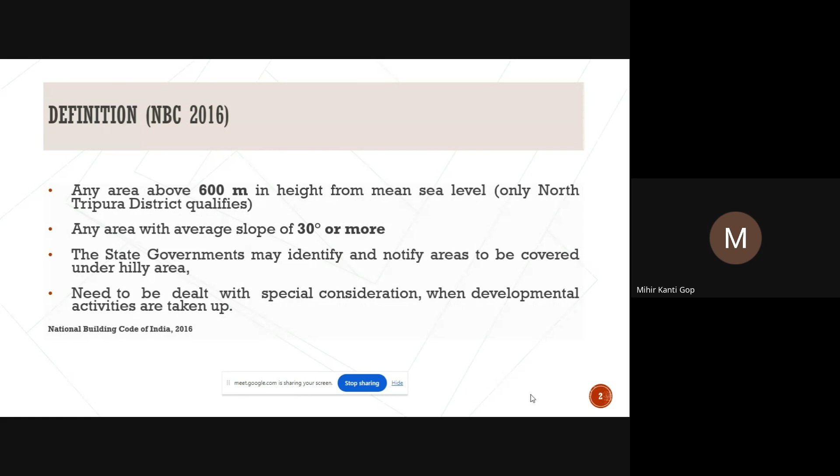Now, what are the challenges for hill area development? Above all, the picture throughout India is the same: urban population growth is increasing. People from nearby areas are trying to habitate themselves in urban areas. A similar pattern is seen in the hill states, starting from Sikkim to Tripura, everywhere.

What are the constraints or challenges we are finding? First is land constraints, because there is limited flat land available for construction. Whether you are an architect, civil engineer, or a general person, you always try to select land which looks very plain for any construction, maybe a school, office, or residential building. So that's a challenge here, first of all.

Then there's greater dependence on personal vehicles, because everybody wants to have his or her own vehicle and finds it comfortable. So inadequate public transport system is also a constraint everywhere. With assistance from JNNURM and now from Mohua, many states have started improving this, but still people want to depend on personal vehicles.

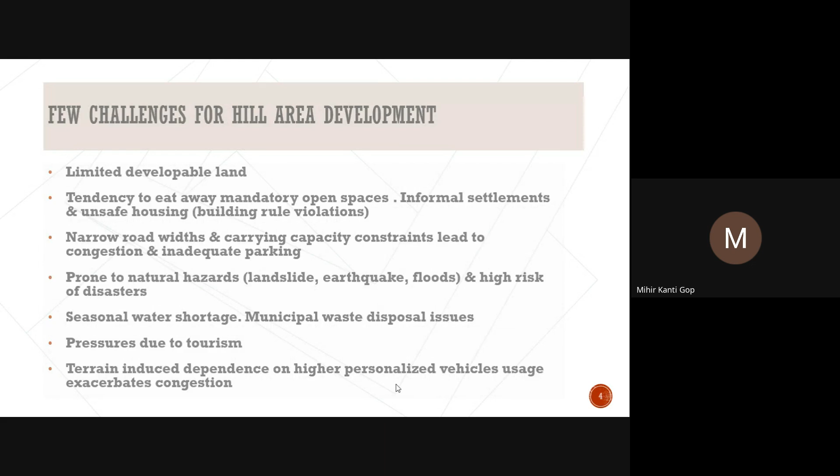There is also seasonal water shortage, which I already explained. Now, theoretically, the general considerations are common everywhere.

While framing or updating building rules, the common themes as a planner we must consider are: population growth, awareness towards environment and social concern, impact on development pattern, impact on transportation network and system, tourism, occurrence and vulnerability to natural hazards, impact on existing buildings, impact on open space and social infrastructure, scarcity of buildable land, impact on natural environment, impact on new development, and impact on townscape.

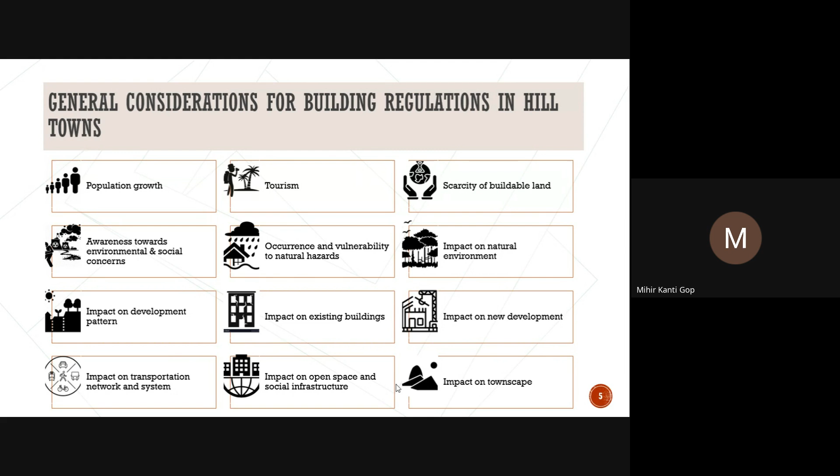A few things not mentioned that I also want to highlight: in the Northeast, many cities have traditional architecture in old buildings, some built by the then Rajas or the British. So we have to conserve our heritage as well - this is also something we need to consider.

Now, what are the adaptations? We have building rules, traffic regulations, pedestrian zones, waste management, water supply management, tourist management, and disaster mitigation, preparedness, response and relief. In many states, some of these are integrated, but in many places they remain disintegrated.

Time has come to integrate these, because when a new construction or project is taken up by any agency or private developer, the architect only works with the building rules. In many states, waste management rules - solid waste, liquid waste management - and water management are framed separately and not integrated with the building rules. So developers only follow the building rules but miss the other statutory regulations.

So we need to integrate these state-wise. If different rules are being adopted for different aspects, let us integrate them, since the state is the same, the land is the same, and the rules are framed by the same government. Why not have a composite framework? This will help the entire developer, architect and civil engineer domains, who are normally the main stakeholders of construction.

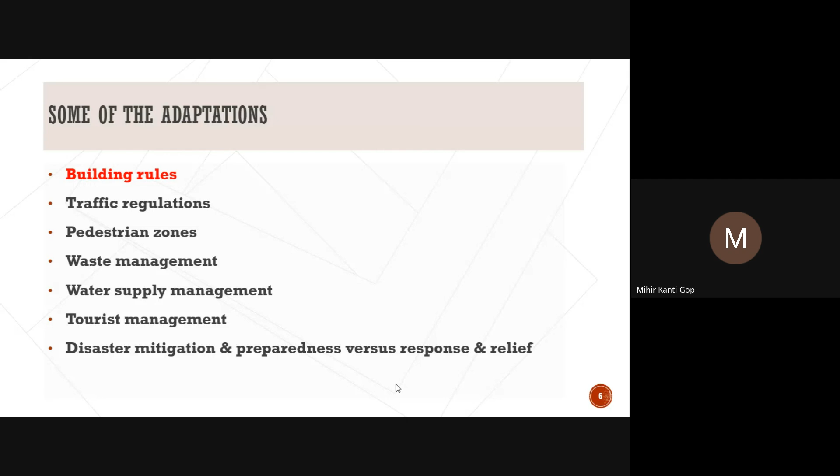Now, in our Tripura building rules, there are a few features already included which I would like to mention, so we can hear from the other two experts today as well.

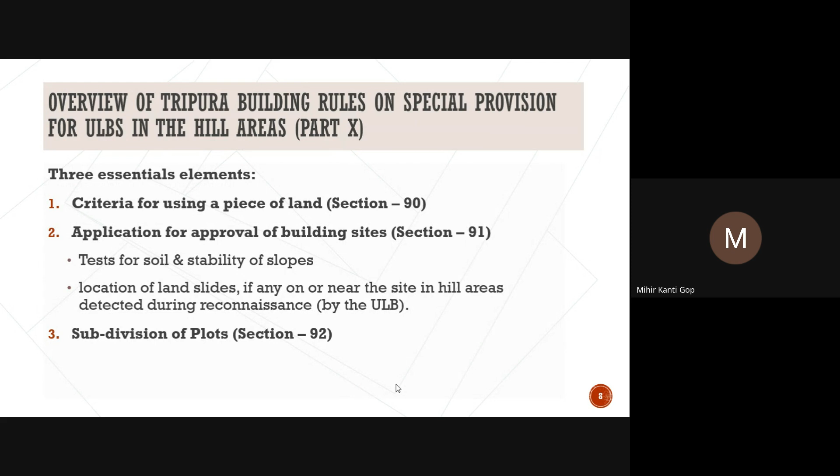There are provisions regarding criteria for land use, soil stability and slopes, and location of landslides if any near the hill area site, detected during reconnaissance. We are working on a GIS-based master plan and a risk-informed master plan, where we may identify these lands and locations, and accordingly our building rules need to be modernized with amendments.

Subdivision of plots is also mentioned. In our case, the minimum road width for a site should be 2 meters - this varies from state to state. Minimum plot size is defined as 100 square meters for residential and 40 square meters for non-residential, and plots should be reasonably secured from hillside slopes. Mandatory soil tests and certified slope stability are also required.

Approval from the concerned ULB is required, and minimum width of means of access is 2 meters for mother plots of 500 square meters and 3 meters for plots larger than 500 square meters. These are, I think, common in other states too.

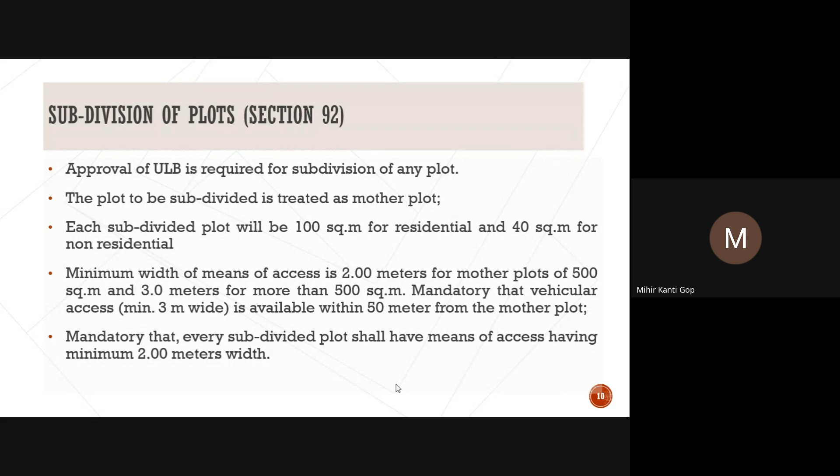Now, for community purposes, land should be reserved 7.5% to 10%, depending upon the size of the parcel of land.

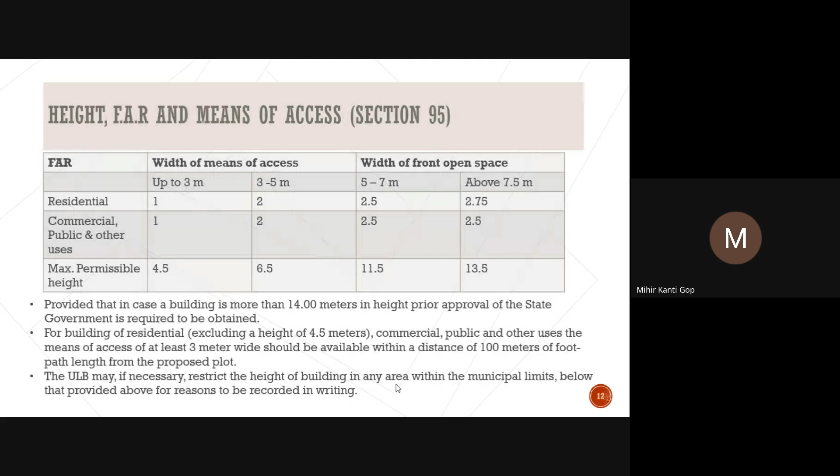Similarly, FAR, height and means of access are also mentioned - what would be for residential, commercial and public, maximum permissible height, means of access - everything we have mentioned.

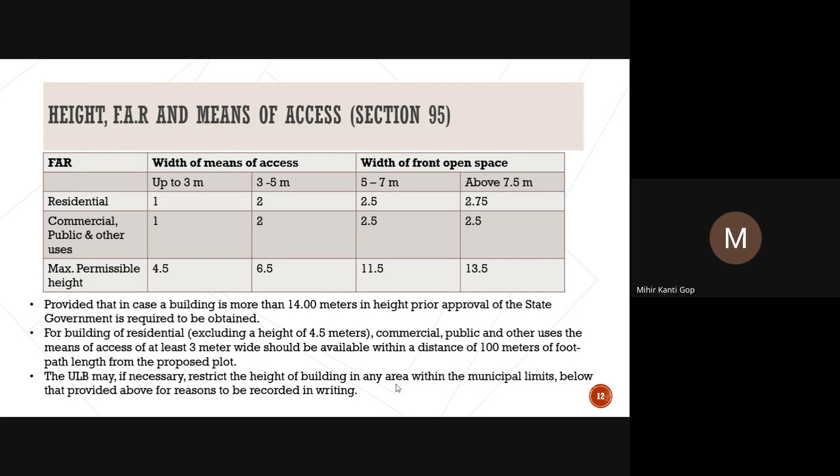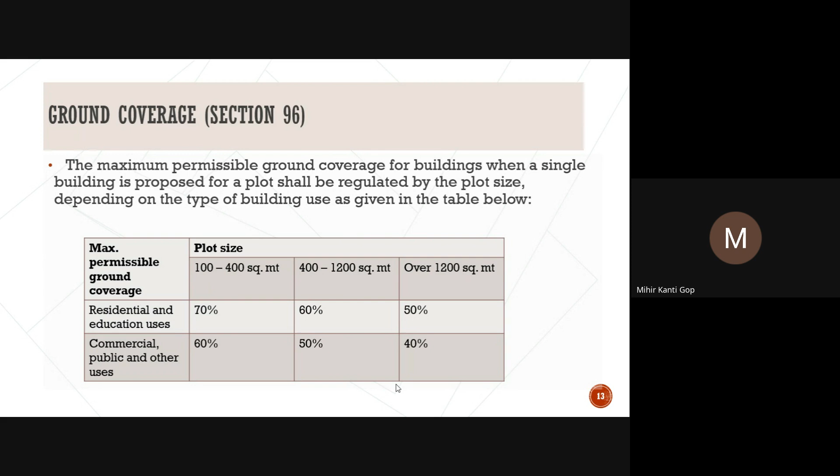Now ground coverage - I think it's more here compared to other states, because land value is very high in Tripura. For smaller plots, for residential and educational purposes, it is 70%. For commercial, it is a little less. For bigger plots, the percentage is less. So this is an average percentage of ground coverage.

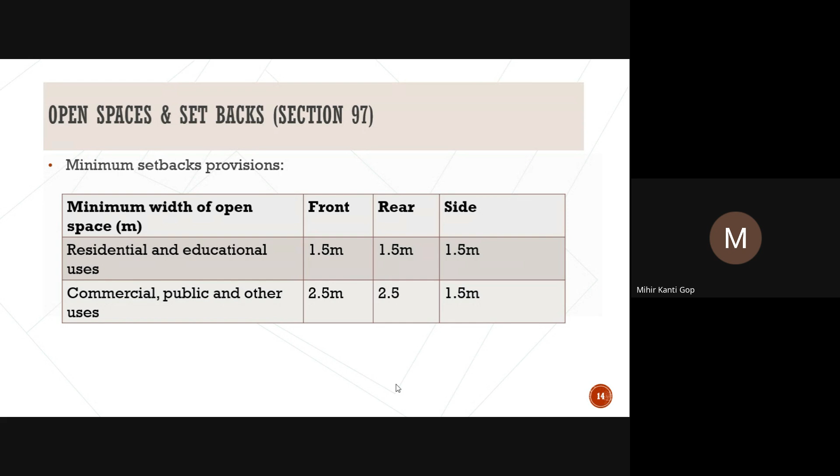Some synopses I just put here to have a comparison with other states. Let us also hear from other states how it is there. We are also working on modernization of our building rules. I hope from these discussions, someone may highlight some of the parameters, and it will encourage us to know what is happening in other states also.

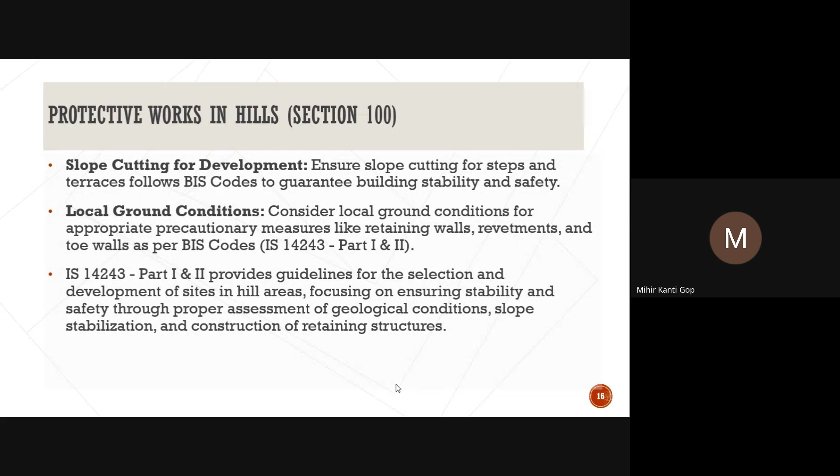Now, protective works in hilly areas - slope cutting for development, local ground conditions. Some precautionary things are already mentioned in our rules, including cutting of slopes over a height of 6 meters - what the parameters should be, how it should be done - that is also mentioned.

These are a few things I would like to mention in this online session, because nowadays, whether it's any state government or even the ministry, everybody wants our urban cities to grow and develop. Everybody wants this, nobody wants to stop this, but everybody speaks a little differently nowadays. Everybody is now saying urban transformation through land development.

So now, in the Northeast perspective, whoever the people are involved - maybe in town and country planning offices or directorates, in different ULBs, municipalities, councils, nagar panchayats, and similarly in different urban authorities - we have one urban authority in Tripura too. Everywhere, the people working there, mostly technical people - civil engineers, architects, urban planners, urban designers - have some requirement of more exposure, which is very much required. People in service for 10 or 15 years do not have that much exposure to what is happening in other places.